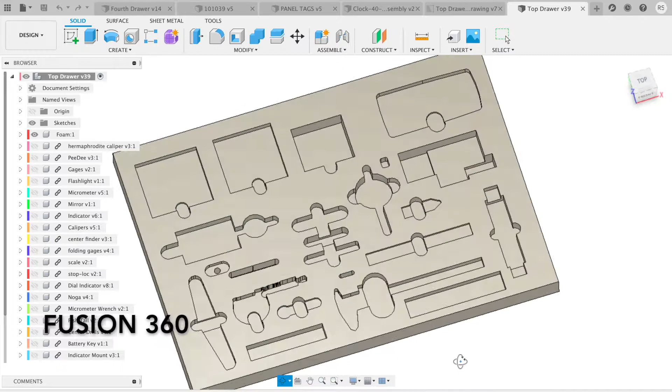Today I'm going to walk you through the process of setting up your toolbox using Fusion 360, some foam, and a CNC router. The process isn't difficult, but it can be time-consuming, so get ready.

The process starts by taking a high-resolution photograph of the part, but we want it to be a silhouette. To capture the silhouette of the tool, I created a giant shadow box. Basically, I have an LED light at the bottom and a piece of plexiglass, and the light shines up and creates a contrasted image of the tool. I can then photograph it with the camera with the white balance adjusted. Turns out pretty good.

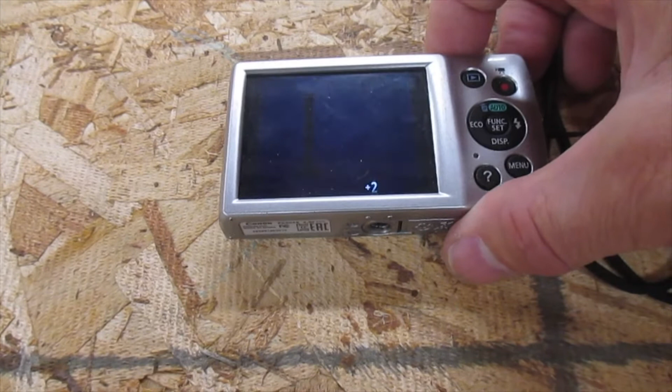I then pulled the image into the computer, and using the image software adjusted the contrast and the white balance and all the other controls until I had an image that was very contrasted. You want it to be sharp so that when you auto trace it, you will get as much detail as you can with as minimal distortion as possible. I then uploaded the file to Convertio, which is an online file conversion program, and converted it to a scalable vector graphic ready to be imported into Fusion 360.

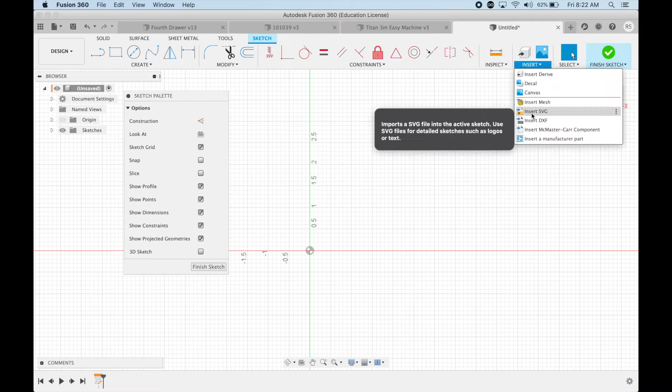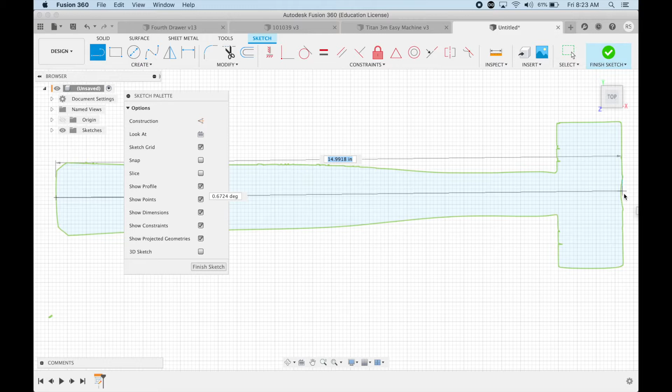Like most Fusion 360 drawings, you're going to start out with a sketch, and you're going to import the scalable vector graphic to that sketch, and then draw a line across that part and get a length or a measurement that you can use to scale it. The part measures 10.5 inches in real life, so it measured quite a bit longer. So we're going to scale this down. So we're going to take 10.5, divide it by 15, and that gives us a factor of 0.7.

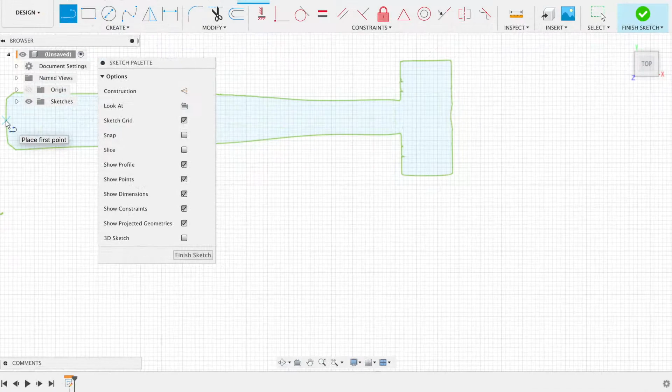Now re-import your scalable vector graphic, and this time scale the model by your factor value 0.7 or 70%. This will give you a one-to-one real-world model. Take a few minutes to clean up your sketch. You're going to see some artifacts from the photograph. Just clean that up, make it look good.

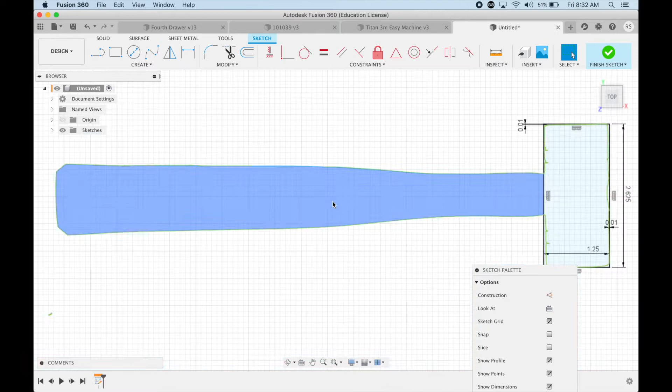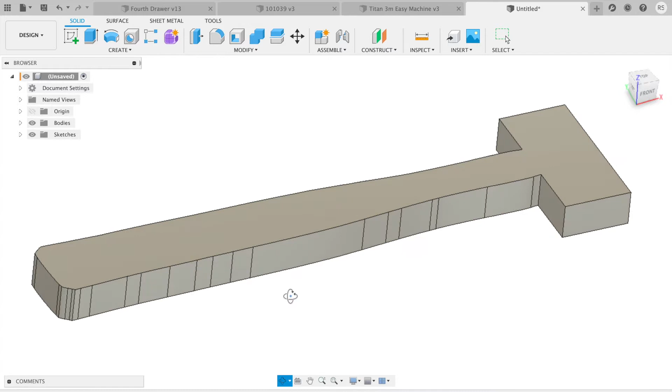Once you have the sketch cleaned up, you're ready to extrude it to whatever the desired depth is. In the case of this hammer, I find that about a 1/2 inch is adequate. It still allows you to grab the hammer, but also doesn't take up too much space in the toolbox. So we're going to go with a 1/2 inch. Some tools, like the digital calipers, will require finger holes to access the tool in the foam. So add those to the sketch and extrude them, and that'll give you, or the operator, a place to grip them and pull them out easily.

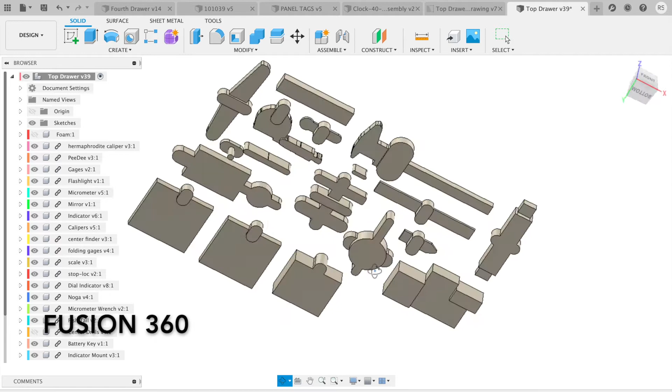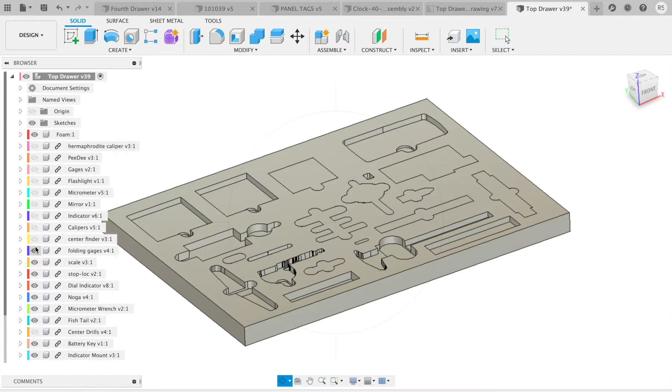Once you've created solid models with all the appropriate cutouts and modifications that are required, you can arrange them in whatever order you want that fits within your toolbox geometry. Here you can see I've got my top drawer laid out, and I'm simply using the combine tool to cut out the negative space from the foam. And I find this to be much more efficient than trying to maintain 2D sketches with various depths. Also, when I get new toolboxes or additional toolboxes, I can recycle those tools, make new foam.

It's very easy. The cutter is made by ONSRUD. It's a 1/4 inch carbide 2-flute upcut designed specifically for cutting foam. You can plunge directly in, go about as fast as you want, and it leaves a good finish. Been very happy with it.

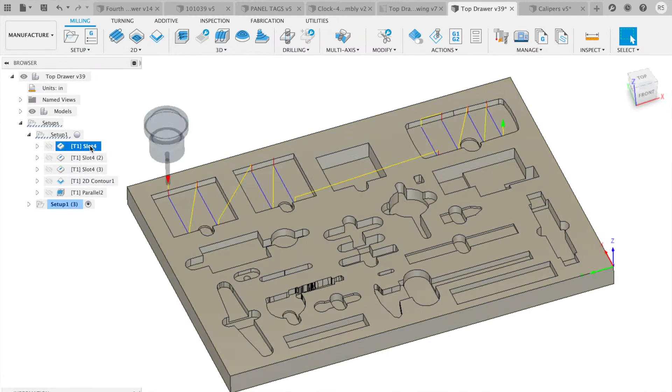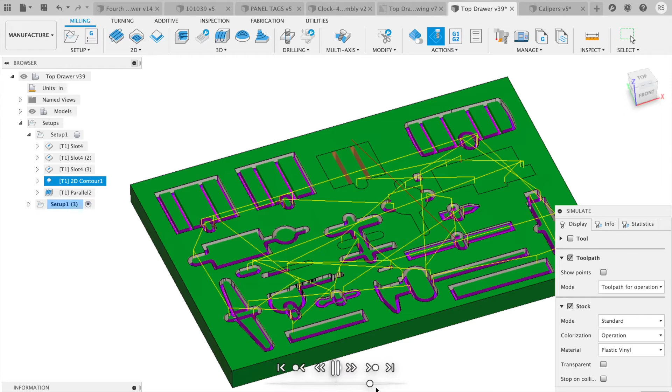So the cutter we're using is made specifically for foam, but one of the things that we encountered early on was that occasionally that foam would want to wrap around the part, especially if it was long. And so the first thing we do is we go through and we cut up all of the longer areas just using a slot. And then we come back and we profile all of the cutouts.

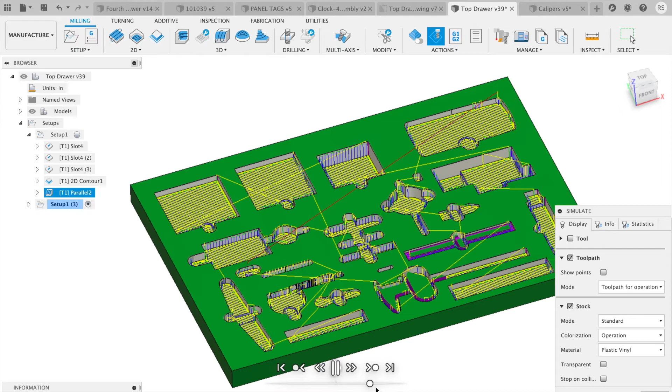And following the profile, we do a parallel finishing. And I found that doing the parallel finishing at a 45 degree tended to give me a little bit better finish, and it also discharged the segments a little bit better. And that's likely due to the shape of the parts I'm doing. But I also found that if I could go both ways, both climb and conventional, it would increase my speed overall, and this allowed me to get more work done per day.

I ordered the custom foam blanks from Foam Fit Tools. This is the second time we've used them, been very happy with the quality.

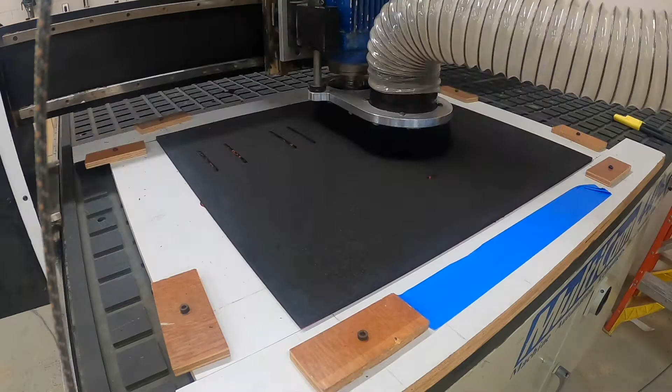Here I am at the multicam router, and I'm cutting out the top drawer, and the fixture is pretty straightforward, just using some scrap plywood around the perimeter to keep it from having the potential to shift, and then also using the vacuum table to suck it down. And this has worked out phenomenally well.

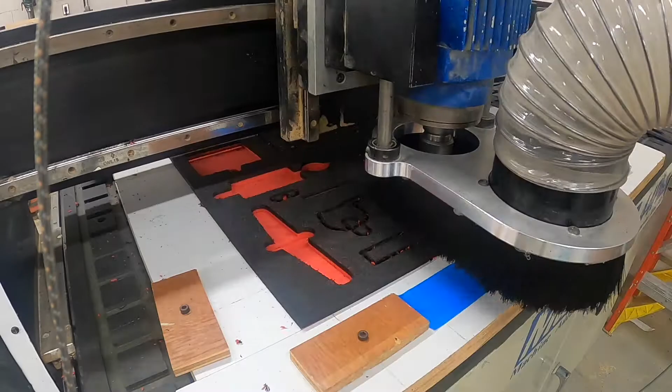The dust collector is absolutely critical for your success. Otherwise, you end up with the little bits of foam wrapping around the cutter. And when that happens, it kind of burnishes or gets an area hot and melts the foam. And it just doesn't look very good. So this was some of the first footage that I shot using the time-lapse function, and as a result, no sound, but the video looks really good.

Then went into the shop and began to load out the toolboxes. These are new toolboxes to us this year, and so these are all new tools, and so it's pretty important for us to take care of them and get them put away. And so it's kind of fun to open those Starrett boxes and slide all those nice tools into their resting place. We try to keep the toolboxes loaded with what an apprentice might need for their first year or two when they start. And of course, you'll build your number of tools over time, but this is the basics.

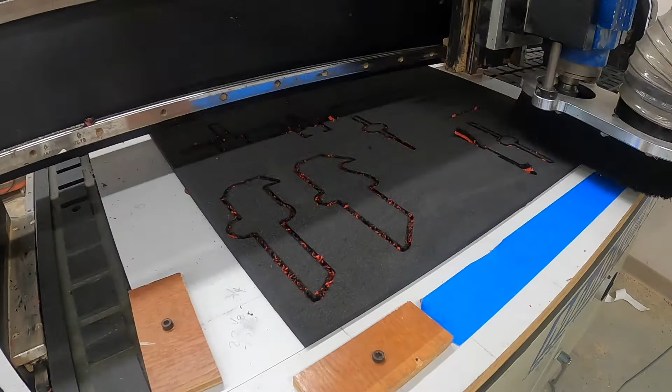After the first drawers were done, it was on to the second and third drawer, and went pretty quick. The router's working very well. The new pinion shaft that we put on last week eliminated our backlash issue. We put several hours on it and pretty happy with it.